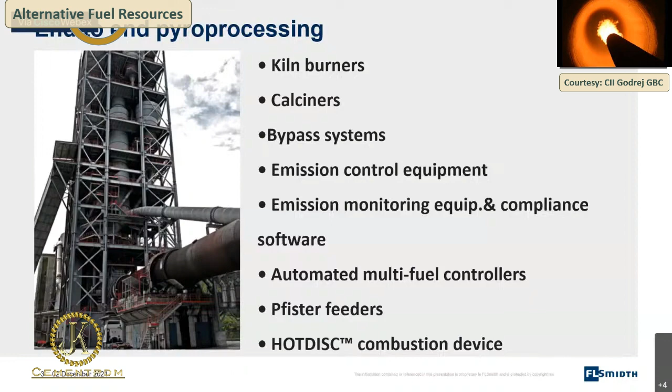What is the value chain in alternate fuel utilization in cement plants? Although we provide a complete solution, it is not always necessary to implement major modifications in order to increase the TSR percentage. To test alternate fuel within less than 5%, you need not have major modification in your existing equipment. If you want to go for a higher TSR percentage, more than 5%, up to a level of 50 to 60 total TSR percentage utilization, then we have to look deeper into various aspects, starting from receiving various types of alternate fuel, segregating, feeding system, firing equipment, what is the impact on process, what is the impact on quality, and what emissions will come out of the cement plant. These things have to be analyzed upfront before going into the system.

Of course, we have to work out the TCO also, total cost of ownership, for the investment we are going to make. To help keep your cost at a minimum, we also offer a special alternate fuel audit, combined with CII, to focus on key components including mapping of alternate fuel in and around your plant, ensuring uninterrupted supply of alternate fuel in correct quality and quantity, layout feasibility study, how to upgrade your existing equipment, process and quality impact, and emission support.

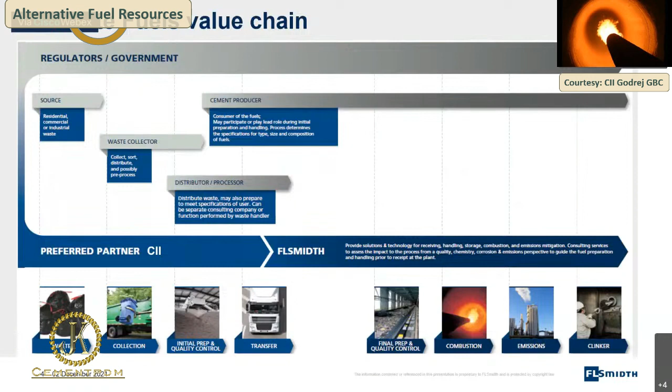In the second portion, on the right hand side, you can see what various types of equipment are presently available, the latest equipment to enhance TSR percentage in cement plants, how to retrofit with your existing equipment, or if you are trying for a new installation or a green plant, you can go with the latest technology with digitalization.

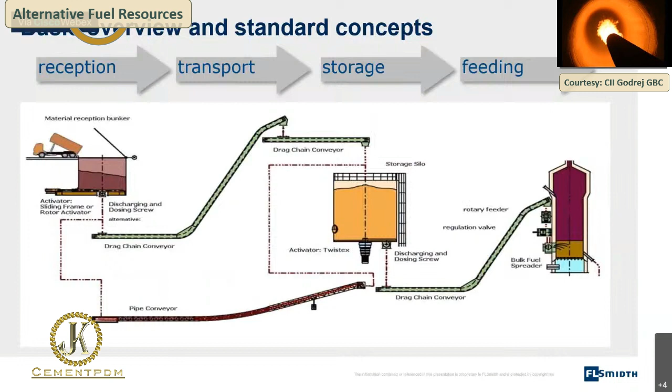So the basic overview and concept available in the AFR system is receiving of alternate fuel, how it is transported, how it is stored and extracted, and the feeding and firing equipment. There are various steps involved in this material handling, that is alternate fuel handling system, and various types of equipment are available which can suit and be selected based on layout feasibility. We can come to your plant together with FLS as a team, study the layout, and then design the correct equipment feeding system needed for your plant to suit the available alternate fuel in and around your plant.

So the basic approach we follow in enhancing the TSR percentage or providing a solution to fire AFR in your plant is: first we collect the AF properties and the type of alternate fuel available in and around your plant, the required quantity based on the TSR percentage needed and the capacity of your plant. We work out the cost economics.

Then what pre-treatment or screening is needed inside or outside your plant—those requirements will be evaluated. What storage capacity and storage method is needed for the alternate fuel? Extraction and mixing requirements will be evaluated. The dosing equipment and conveying method will be decided based on the existing layout, if it is going to be a retrofit or upgrade of your existing system. And what feed method, whether mechanical or pneumatic, what are the limitations in your pyro system, and feed point identification.

So these are the broad activities we do or support you with while you think to enhance the TSR percentage.

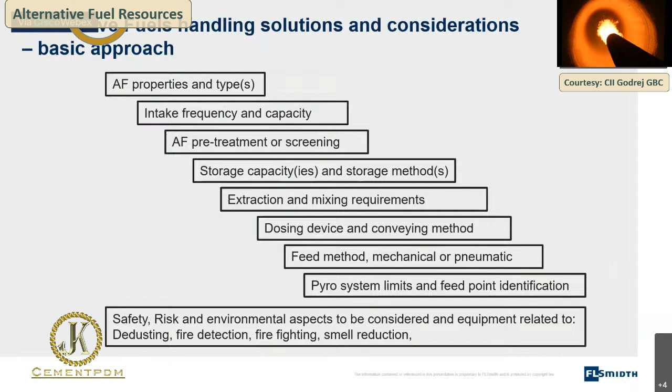And also, in addition to this, we also provide you the safeties that have to be followed during AFR firing, risk and environmental aspects to be considered while selecting the equipment in terms of de-dusting, fire detection, firefighting, and odor reduction. So this kind of support we are providing to all our cement customers.

So when we see the overall products, we can classify that into four broad classifications: reception, transport, storage, and feeding. Under reception, some of the equipments we offer are Surfex feeder, docking station, volumetric dosing equipment, apron feeders, and screw bottom conveyors. In transport, we have various equipments.

Storage and feeding equipment includes Feedex overhead reclaimer, silo and bunker activator, and screw bottom storage system. In feeding, it is a bulk fuel spreader. And then firing equipments we will see in the next slide.

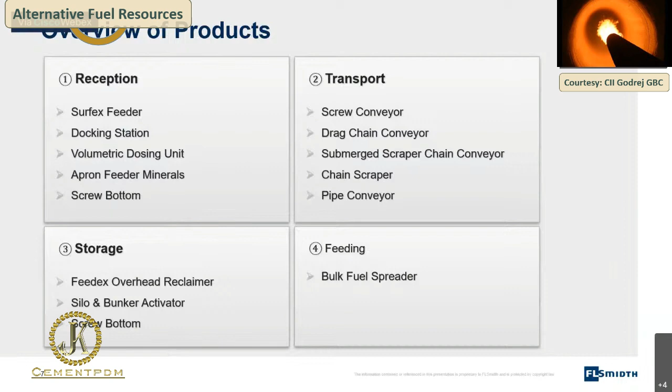So going into our firing equipment, we have two types: one is the low NOx calciner itself, and the second is our HOTDISC reactor. The advantage of this low NOx calciner is that it gives a combined advantage of utilizing alternate fuel for earlier fossil fuels while generating less NOx emission. Our low NOx calciner is well suited to substitute 80 to 100% of calciner firing, so the overall TSR percentage can be achieved at 50 to 60% using alternate fuel only in the low NOx calciner itself.

This low NOx calciner can take alternate fuel of size 100 by 100 millimeter, meaning two-dimensional material can be easily fired if the calciner is rightly sized with required residence time. Tire chips up to 50 mm can be fired in our low NOx calciner, fed into the kiln riser or the exact location where the alternate fuel has to be fed, which will be evaluated during the baseline study.

So large particles stay in the bottom zone of the calciner, in the riser zone, where we get ample time for drying, ignition, and complete combustion of alternate fuel. High oxygen level ensures faster burnout, meaning in TAD we get 21% oxygen. With a high temperature, we enable complete combustion of alternate fuel. The long residence time and low velocities are ideal for alternate fuel firing, which is achieved in the low NOx calciner.

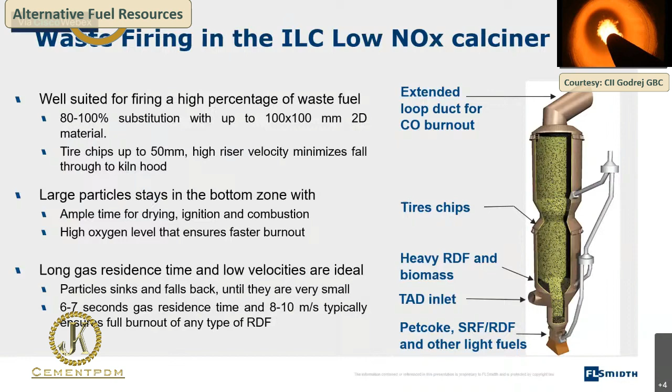In this slide, we show you the different location identification for feeding alternate fuel in the low NOx calciner, based on physical characteristics like size and bulk density. Based on these two characteristics, we decide where the alternate fuel has to be fed into the pyro process, so that there will be minimum process interference or quality fluctuation.

So we can size alternate fuel equipment to fire 100% substitution of alternate fuel, that is 40% in main burner and 60% in calciner. Overall 100% substitution of alternate fuel is possible in a cement plant, provided you get an uninterrupted supply of quantity of alternate fuel in the right quality.

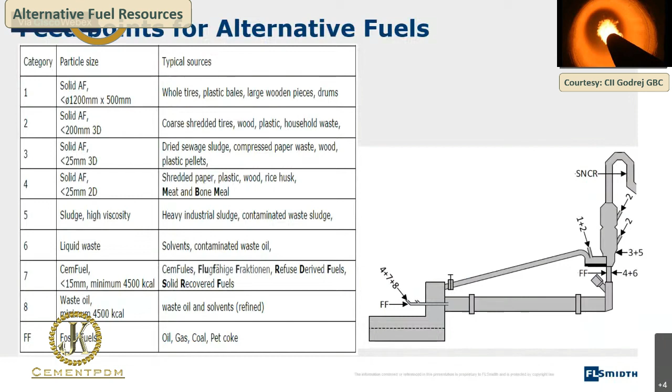And upfront, we have evaluated the requirement of drying system for alternate fuel, whether any chloride bypass system is needed, or what will be the impact on quality, emission, and process—all pre-assessed. If properly designed, the plant can easily go ahead with 100% substitution of alternate fuel.

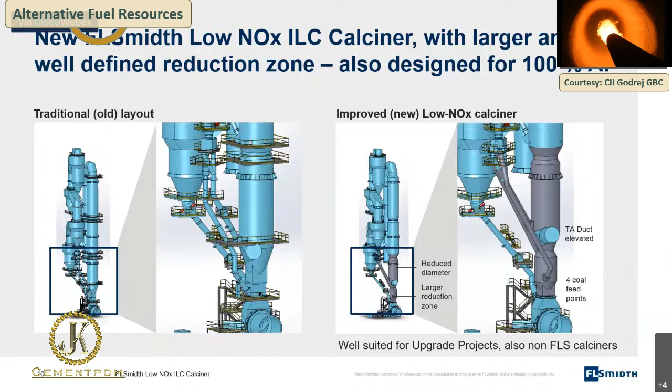Here we showcase one case example where the plant wants to increase the alternate fuel substitution. We have done some modification in the calciner along with some preheater cyclone modification, so that the plant can increase the alternate fuel substitution rate to more than 10%.

In this plant, after modification, the inline calciner outlet gooseneck has been enlarged to the bottom cyclone inlet, so that we get additional residence time to ensure 100% complete combustion of alternate fuel. After the retrofit, the plant capacity has increased from 5740 TPD to 6300 TPD.

Fuel consumption has reduced by around 64 kilocalories. That is because of the change in cyclone, and also the top stage cyclone was replaced with the latest generation CCX type counter current exchange cyclone. Because of the bigger cyclone retrofitted, the pressure drop across the preheater also has come down.

NOx emission has reduced due to the increased reduction zone, and also CO has come down due to increased residence time, and the plant is now very well suited for increasing the alternate fuel substitution.

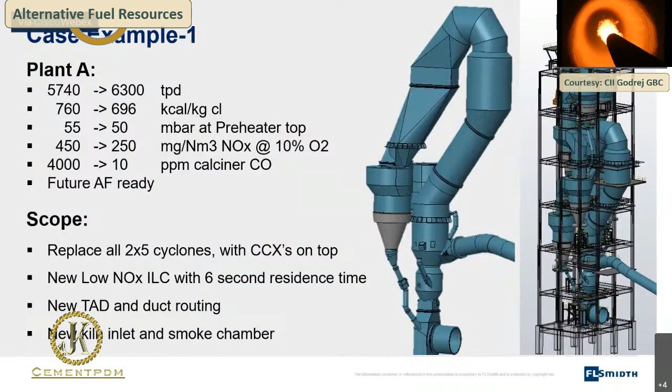So what we have done in this plant is replaced all the cyclones with a bigger diameter. The top stage cyclone is replaced with a CCX cyclone, that is counter current heat exchange cyclone. The Low NOx calciner is upgraded for 6 seconds residence time. New bigger TAD, and routing has been changed, along with a new kiln riser and a smoke chamber.

In this case example 2, the plant wants to increase the alternate fuel substitution with the addition of a hotdisc reactor itself. An 8 dia hotdisc was retrofitted in this plant along with the pyro preheater upgrade and raw meal upgrade, so the plant was able to increase the thermal substitution rate up to 90% with the new hotdisc as well as a change in burner.

Along with the increase in pyro capacity, that is from 3700 TPD, the capacity also increased to 5000 TPD with high AF substitution, so that the payback can be easily achieved in less than 2 years.

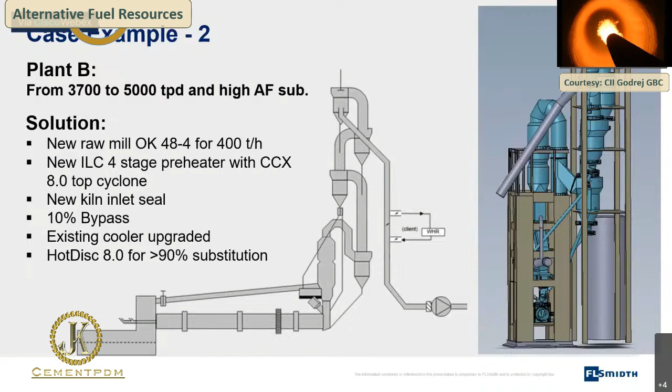So what are the process implications or process constraints optimization needed when we aim for higher TSR percentage in your plant is detailed in this slide. That is, loss of production capacity due to the capacity of the ID fan will come down whenever we are using alternate fuel, mainly due to the low calorific value of the alternate fuel combined with high moisture content eating away the ID fan power, meaning increased ID fan power is needed. This is a main constraint whenever the plant needs to go for a higher TSR percentage.

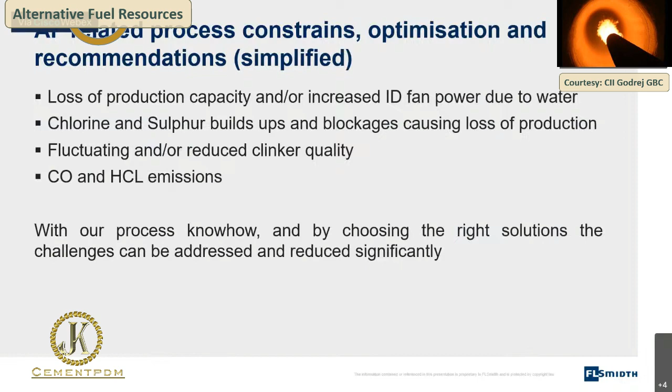Other components which come along with the alternate fuel, like chlorides and sulfides, give process fluctuation or process hindrance while firing the alternate fuel. Fluctuation or reduced clinker quality, any impact on clinker quality is always foreseen whenever a higher percentage of TSR is tried in any plant. CO and HCl emissions have to be mitigated. With the process know-how and choosing of the right solution, right equipment, these challenges can be easily addressed and reduced significantly for higher TSR percentage.

When we talk about the ID fan capacity being reduced as alternate fuel percentage is increased, that is mainly because alternate fuels come with inherently high moisture content and low calorific value. These two combined are eating away the margin available in the ID fan. If a margin is not available, then there will be a penalty in the output.

So in this slide, we are comparing two different fuels: anthracite fuel or a petcoke type of fuel with RDF. We can see that as moisture content increases, the increase in flue gas amount is more or less flat when using petcoke, or only slightly increasing, a smooth increase. When we switch to RDF firing, with the increase in moisture content, the increase in flue gas amount is tremendously increasing.

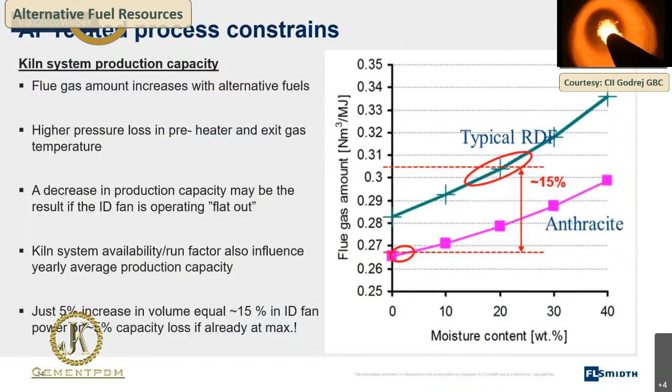There is a steep increase in the flue gas amount when switching from one fuel, that is coal or anthracite, to RDF. A 15% reduction or increase in power or fan capacity will be foreseen when there's just a 5% increase in volume of the flue gas. So that has to be studied in detail upfront before the plant wants to increase the alternate fuel.

In this slide, a comparison has been given for alternate fuel substitution rate and its impact on fuel and preheater fan power consumption. For every 1% increase in alternate fuel, roughly as a thumb rule, a 5 kilocalorie increase in fuel consumption is expected. So we have to look into other possibilities to reduce or maintain the existing fuel consumption while the plant operates with increased TSR. That should be the aim, which we take care of during our baseline study.

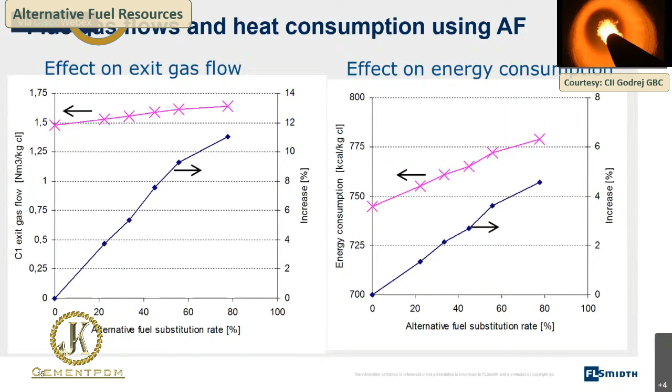This is another case example of a plant that started alternate fuel and wanted to increase the alternate fuel TSR percentage, and what the impact was on fuel and power consumption. This is a plant in Egypt operating at 5650 tons per day, with 734 kilocalorie per kg clinker fuel consumption and 6.97 kilowatt hour per ton as preheater fan power consumption. When they increased the TSR to 7%, they installed a hot disc reactor of 6.3 size and achieved 7% TSR substitution, but fuel consumption increased to 757 kilocalorie per kg clinker from 734, and power consumption also increased by 1.7 units.

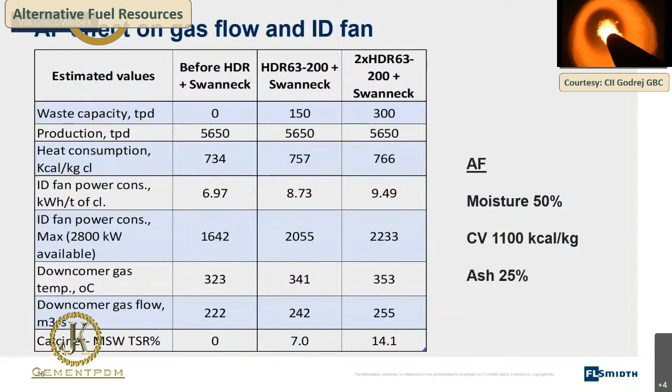When they wanted to increase the TSR further from 7 to 14%, the calciner had to be enlarged for additional residence time. They achieved 14% TSR, but fuel consumption increased further by about 9 units, reaching 766. From the baseline value, around 30 to 32 kilocalorie fuel consumption increased for a 14% increase in TSR.

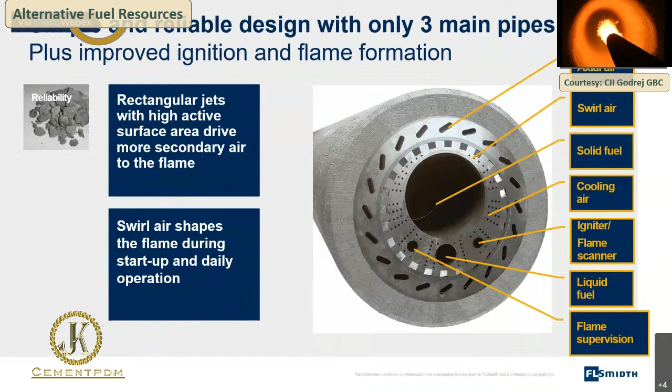These are some of the products we offer for alternate fuel usage: the JETFLEX burner, a modern burner that can be used for any type of alternate fuel with 100% substitution in thermal firing, and the chloride bypass system, which we design based on the type of alternate fuel by analyzing your chloride content.

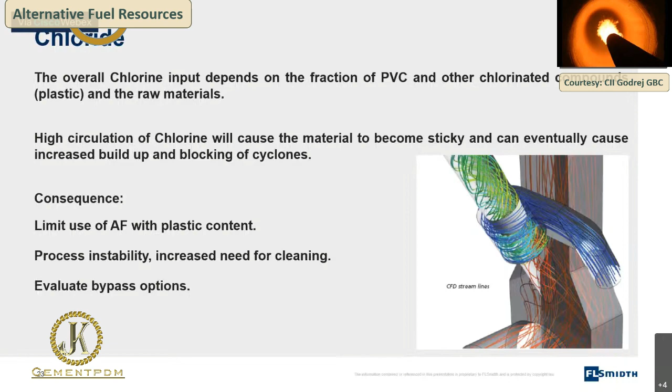The chloride bypass will be needed if the hot meal chloride percentage crosses 0.8. 0.8 is the limit, and 0.8 to 1% is the limit of chloride content in your hot meal. If it is crossing that, we have to retrofit your system with the chloride bypass, which can be easily retrofitted in the existing system after a layout study.

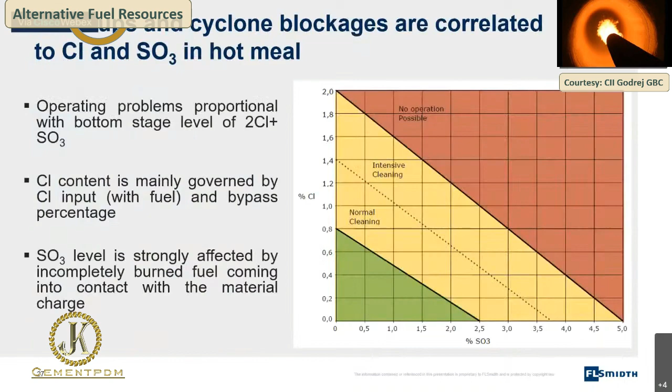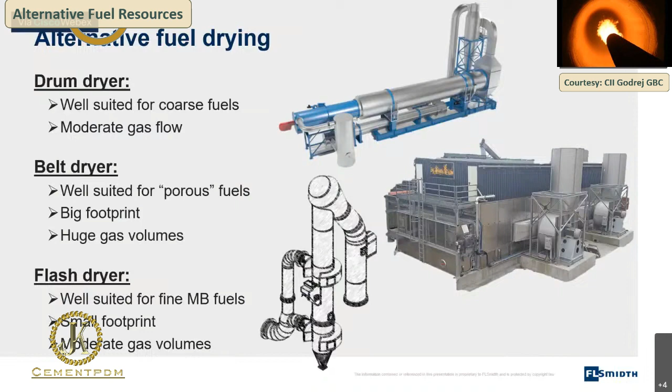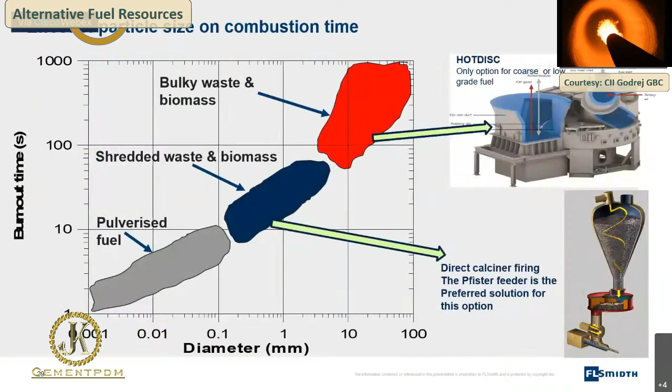These are some of the drying equipments we offer based on your layout and investment requirement. We have three different types of drying systems: a drum dryer, a belt dryer system, and a flash dryer for alternate fuel drying. We also offer a process expert system for multi-fuel control — an automatic PXP system which controls your alternate fuel and fossil fuel in combination and provides good control without increasing your TSR percentage.

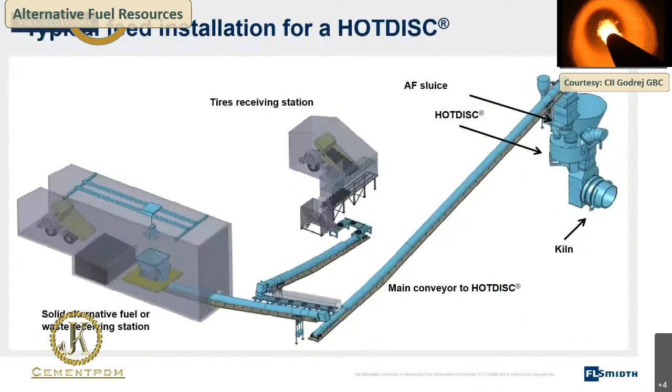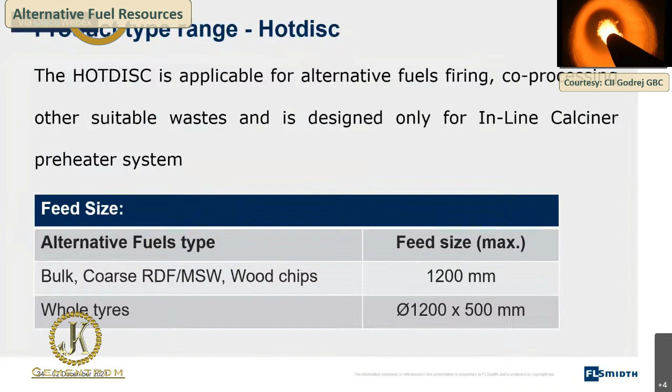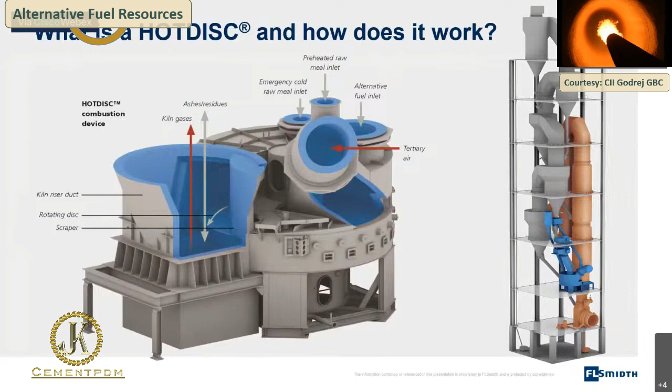This is a layout for a HOTDISC location, which I will explain. The alternate fuel in the HOTDISC can take a feed size of 1.2 meters, covering all bulk coarse RDF, MSW, and wood chips in combination. Also, whole tires of 1.2 by 500mm size can be easily fired in the HOTDISC without shredding. So when using the HOTDISC, different multi-fuel alternate fuels without shredding can be easily utilized, and 100% thermal substitution in calciner firing is possible with HOTDISC utilization.

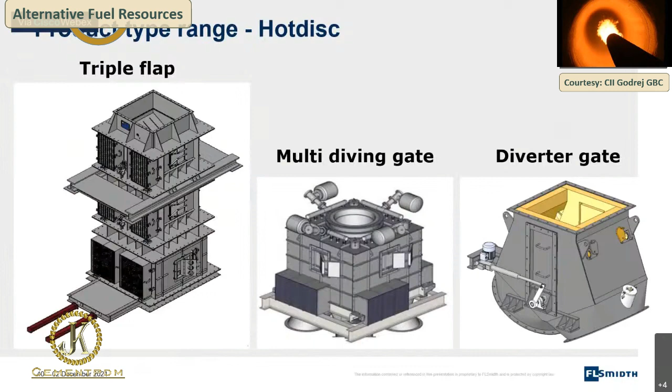This is the layout for the Hotdisc. Some of the equipment that comes along when retrofitting for alternate fuel usage includes the triple flap, multi diving gate, and diverter gate. Based on your layout, we will suggest the right configuration.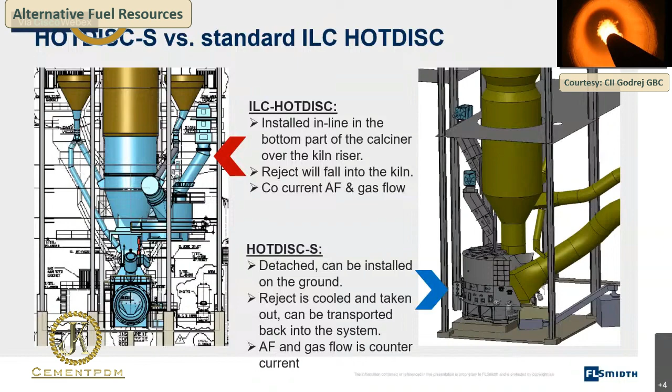For an SLC type of calciner, we cannot retrofit the standard HOTDISC. So for that, we have come up with an improved version called the HOTDISC-S, specifically for SLC type separate line calciner systems. This HOTDISC-S can be easily placed on the ground itself, and whatever ash is generated can be taken out from it and stored or thrown away. That is the main advantage of this HOTDISC-S.